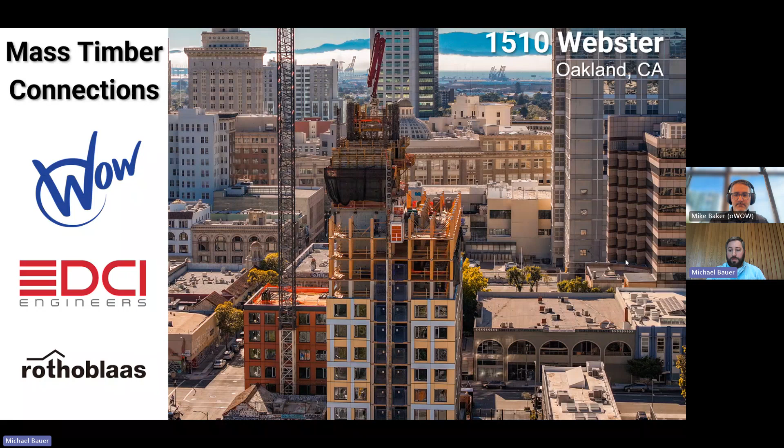Hi, I'm Mike Baker, I'm the Director of Architecture at OWOW. OWOW is a vertically integrated real estate company located in Oakland, California, and we have an in-house development, design, construction, and property management team. Our mission is to create sustainable urban living for the missing middle, so basically people making between 80% to 120% of the area median income.

And increasingly, we're actually moving into the true affordable market, building really affordable housing for very low income people, primarily in the Bay Area, but we're looking to expand throughout California. The way we're doing that, the way we're making housing more affordable, is through innovation. We're driving down costs through using innovative new construction technologies like prefabricated components, standardized units, supply chain management, and most importantly, an innovative mass timber structural system, which is what we're going to talk about today.

Our goal at the end of the day is to build higher quality housing faster and at lower costs through innovation. I also real quick want to add, if anybody has any questions throughout this presentation, if you're on your computer, at the top bar you'll see a Q&A section you can click into and type some questions. And if you're on the phone, you should see 3 little dots at the bottom where you can find that same section as well. We will answer questions towards the end of the presentation.

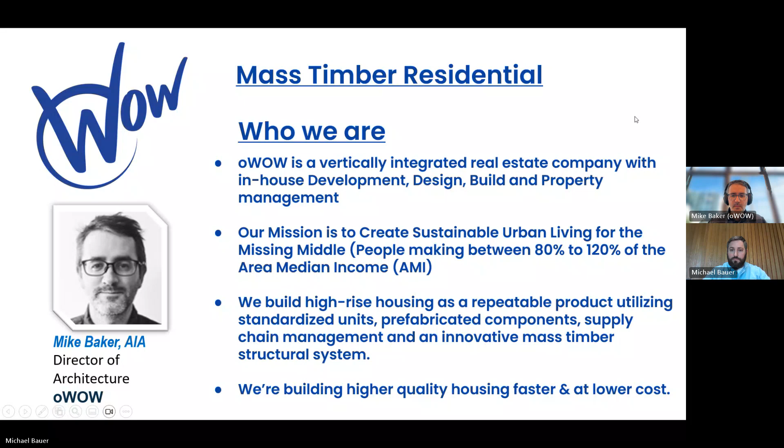So I'll talk a little bit about why mass timber and explain how we're using it. We're using it in a very particular way at OWOW, again to help us meet our mission of driving down costs. A lot of the things we're interested in with mass timber have to do with its material efficiency, its speed of erection. We can build a mass timber superstructure far quicker than we could with other traditional types of construction. That saves us money on our critical path, saves us money on general conditions, and speeds up everything around it. So a lot of that scheduled gain is driven by prefabrication.

So mass timber is kind of defined by its ability to be prefabricated. Everything is CNC machined and milled off-site. It comes to the site like a kit of parts and goes together really quickly. So that's really key to why we're using mass timber.

I think the other big gain of using mass timber is it's sustainable. It has low embodied carbon, sequesters carbon, and based on the kind of suite of other technologies that go around mass timber, there's the potential for lower operational carbon over the lifetime of the building.

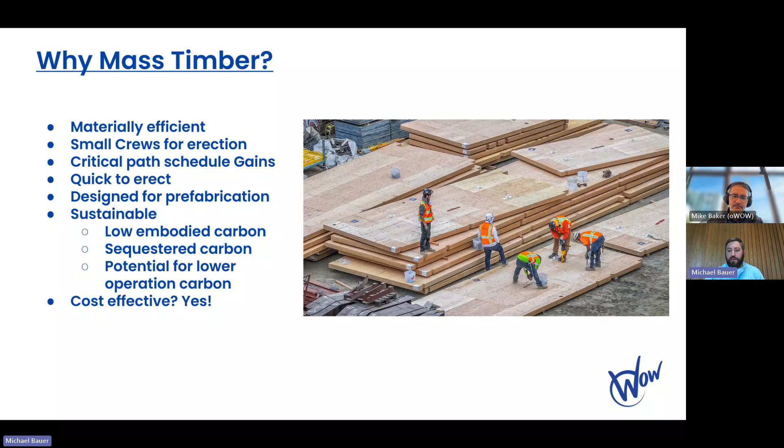One thing I want to highlight, Mike, and you mentioned it, but I really want to emphasize, is that you only use mass timber. All of your projects across the board take that approach, and I think that's one of the keys to pushing the amount of studies being done and getting projects to where they are today. Yeah, definitely. That's the other thing, we're trying to basically replicate our success, learning from projects and taking what worked well to move on to the next project, and to kind of repeat that and always be gaining efficiencies and economies of scale by using the same approach over and over.

And the scale of project that OWOW is focusing on isn't something that we could build out of stick framing. We're replacing projects that would generally be concrete construction, and so there's a lot to gain with all of those points: the sustainability features, the speed of construction, and so honing in on one specific construction type has allowed for a lot of exploration of efficiency. And it's been fun to get to work with OWOW.

I'm Michael Bauer. I'm a senior project manager at DCI Engineers. I'm based out of our San Francisco office, which is, for those of you who aren't familiar, just across the bay. I'm looking out now at Oakland, on the other side of the bay. I had the pleasure of living just a few blocks from the 1510 Webster project while it was in construction, so I was going out there almost every day just to check in on things, and it was an exciting project. I was really excited to be part of it.

I've been at DCI for coming up on about 7 years now. We have expanded. We started in Seattle. We expanded across the West Coast, and then recently we've also merged with some companies on the East Coast, and so now we're spreading from coast to coast, and we've got licenses in all 50 states. So we're happy to work on projects in any state, and also Canada as well. We've got some licenses in Canada as well.

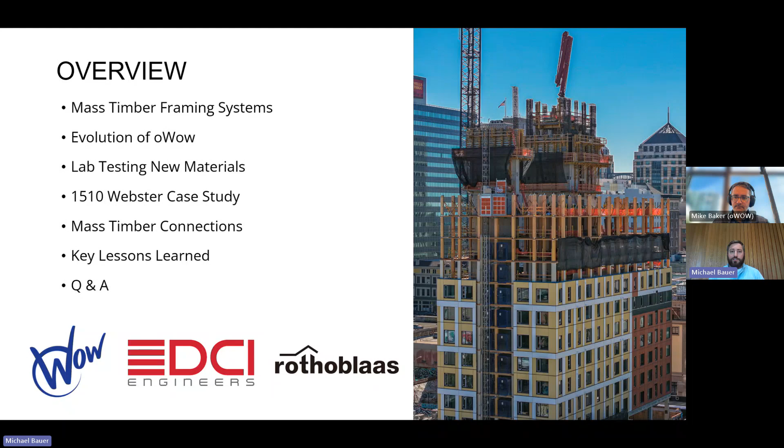So the ones we really want to focus in on are going to be the post and beam, which is kind of more conventional. It's a one-way panel span to beams, and the beams are supported by columns. Now, you can also use a girder system and have post, beam, and girder. We do get nice open spaces. So if you were going to do either a classroom or a larger space, you can get really impressive spans and spaces out of that.

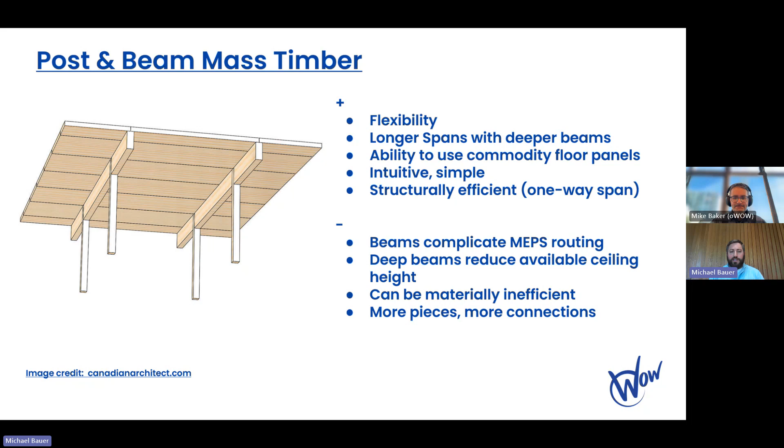The downside for us is going to be that it's going to increase the depth of these elements, and we're going to add a lot of additional connections as well. So there's a time and a place for it, but today we're really going to focus in on the point supported or the post and plate. The post and plate is going to reduce spans, but it's going to increase the clear height. And the key difference that I found was great was it was very easy to coordinate with the MEP consultants on these projects because there's nothing to interfere. It's a lot more similar to a flat plate concrete project than it is a typical mass timber project.

We're not talking about making horizontal cores. And then where we are making vertical cores, our tributary load to these columns is relatively low. So we do have some flexibility with locating plumbing penetrations along the panel. And that's something that we coordinated. We ran modeling analysis on to be able to develop where we were able to do those.

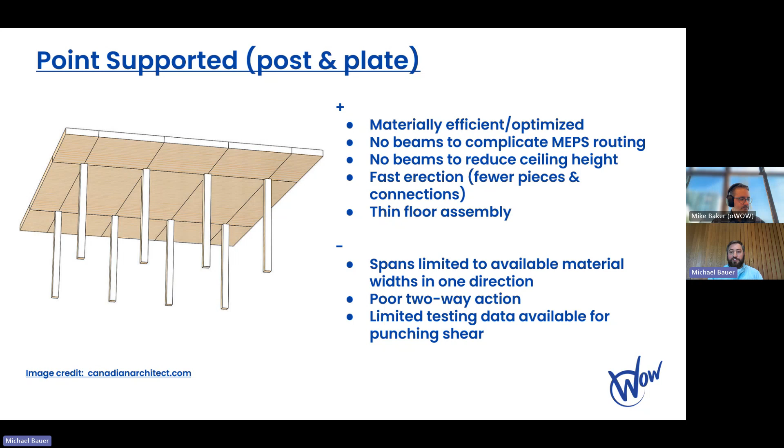But one of the key things on that, and I'll pass it off to Mike for this, is OWOW took the lead on this project, and they knew one of the best ways to find efficiency was going to be to run some tests. So I'll pass it off to Mike, and we'll talk about 12th Street, and then we'll go into some of that testing. Thanks, Michael.

It's a really nice looking commercial space, but we realized that it wasn't going to be a good solution for building affordable housing based on its costs, based on the complications of coordinating all the mechanical through those beams, the depths of the beams that we were going to require. It just didn't make a lot of sense. And so we saw this project up in Vancouver at the University of British Columbia called Brock Commons. I'm sure many of you may be familiar with it. And it utilized a point-supported or post and plate approach. And we saw what they had done and realized it could be the perfect fit for our approach.

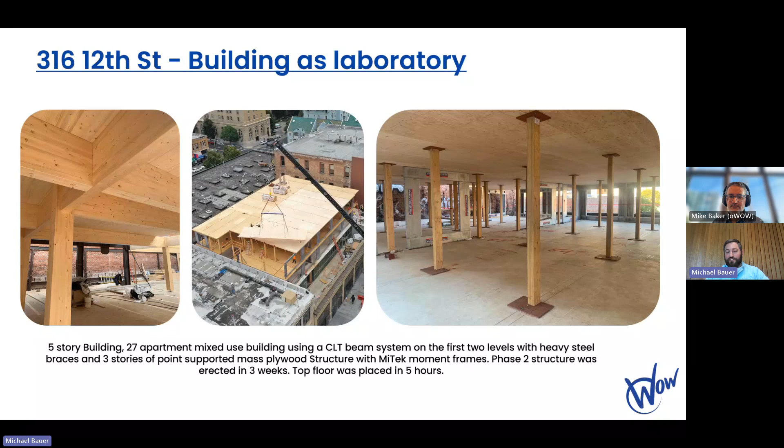Yeah, so we commissioned Wood Research and Design up in Oregon to run a bunch of structural tests, and Michael can probably speak more specifically to the tests, but in particular, because this is a point-supported approach, we needed more data on the punching shear capacity of the panels. So we ran through a whole host of tests, and unsurprisingly, the panels performed significantly better than we had originally anticipated. I think we basically broke the testing rig at like 130,000 pounds. We couldn't force the punching failure.

And there's been some other tests since then. They've had similar results. But the punching failure often causes a flexural failure. So we're still getting that bottom lamella at the point of load application, which is great because punching failure is a brittle failure and we're trying to avoid it. But it was hard to get any data that we could back out after that because it was so strong that it was forcing the limits.

You can see the beam above at the very top of that image here is actually bending a ton, and they were worried about breaking the rigging equipment, not the panel. So the panel was stiff, but it also was meeting the deflection limits that we were looking for. So the testing went really well. Yeah, and those were the key tests.

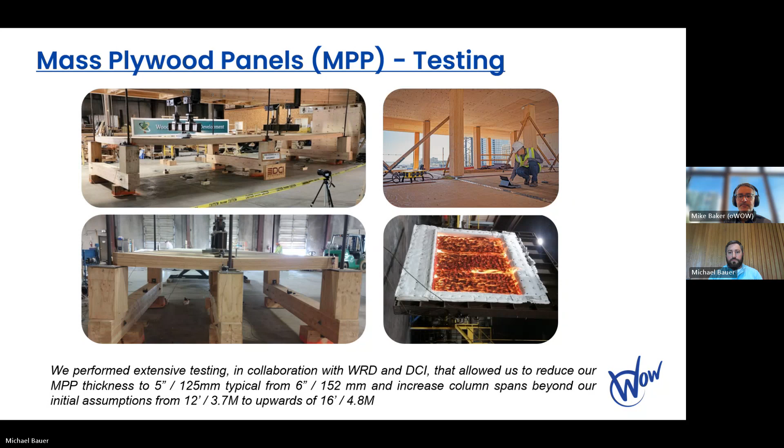So this is 1510 Webster. You've probably heard of it. It's a 19-story project here in Oakland. It's multifamily residential with 236 dwelling units and 186,000 square feet. It has a 2-story Type 1A podium, so it's post-tension concrete. And then above that, we have 17 stories of Type 4A. 16 of those are mass timber, and the roof penthouse is cold form steel.

So this was the first prescriptive Type 4A project in the country. And by that, we mean it's complying as of right with the 4A building code. Here in California, unfortunately, we can only do 17 stories of mass timber as opposed to the rest of the country. But otherwise, it's compliant with the code. And a big aspect of that is everything needs to be encapsulated. It has a 3-hour rating. It's a really robust structure.

The codes are pretty conservative, but even then, we found great success with the erection of the superstructure and the enclosure. So we were able to go from the top of the podium. It took us a couple of months to get the foundation and the podium in place. Once we had the podium in place, we basically built this entire building, superstructure and skin, in 2 months.

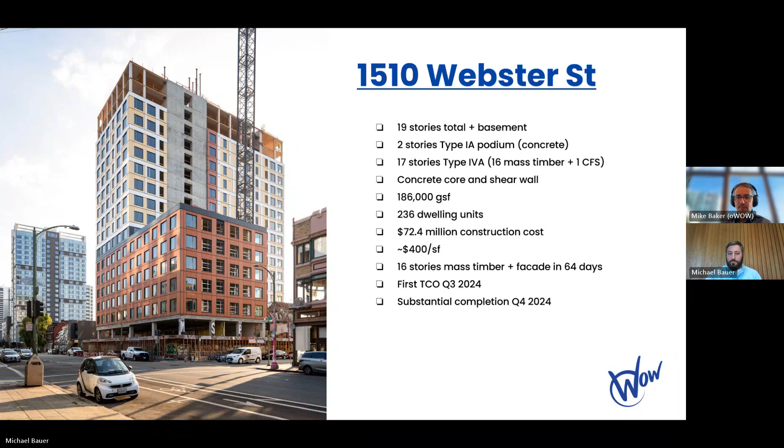Here's a quick video, a little truncated, but it gives you the idea. We were basically doing a floor every 3 to 4 days. We would set the mass timber columns for a floor in a few hours, literally, and we could set an entire floor of panels in less than a day. We're using a prefabricated facade system that comes in large 30 by 10 foot sections that clip onto the building, and we could do an entire floor of those in a day. It was really insane how quick it was going. We could barely keep up.

We'll talk about what made that possible in the next couple slides. One thing to add, you could probably tell from the graphic that the mass timber structure of 16 levels went up just about as fast as the penthouse for the elevator overrun. Everyone knows elevators are challenging, and it really was true here. We had more headaches getting things compliant with the elevator shaft than we did RFIs during the timber installation, which was just a handful, and pretty easy to respond to. So it was really smooth on our front, and you can see from the image how few people are on site.

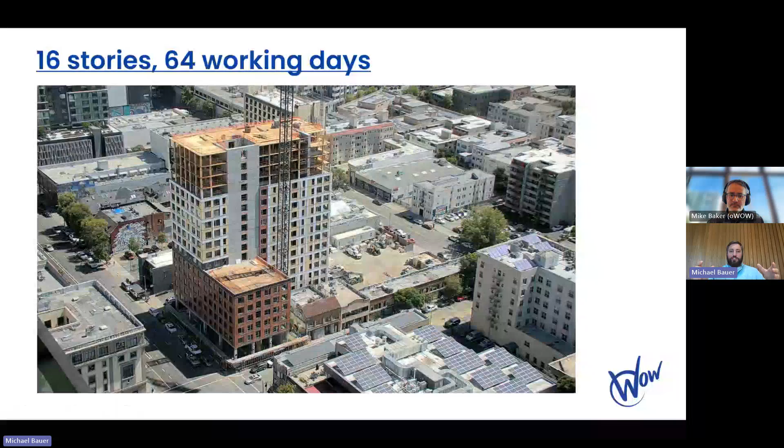One other thing to note is that OSHA does have requirements in the code about how much exposed mass timber you can have. We had a project on Treasure Island that had topped out before they'd set the first facade panel, which obviously isn't great from a moisture protection standpoint. This is in the code because of the fire protection plan, but there's a limitation on how many levels of exposed timber you can have at a given time.

So the facade has to chase the highest operable deck, which means you've got to have a lot of coordination. You can't have something lag. These panels were coming from Canada, so they had to get to site on time, coming off the truck and then being installed in order to release the next level.

That first level was a little slower—the panel still went in a single day, but from the first to second level of timber was 4 or 5 days. Then that repetition got down to 3 days. In the last couple levels, once the core had topped out, they were setting those in 2 days—a day for columns and a day for panels. It felt like they were finishing placing the columns by noon and the panels by 1 or 2 p.m.

So even with all these working days, there was constant crane utilization—they were always doing something. It was super efficient at making sure the next thing was going into place; if they were having issues with a column, they could pivot and tackle something else. Kudos to the OWOW construction team and the Webcor construction team for having that plan in place and really taking full utilization of the crane.

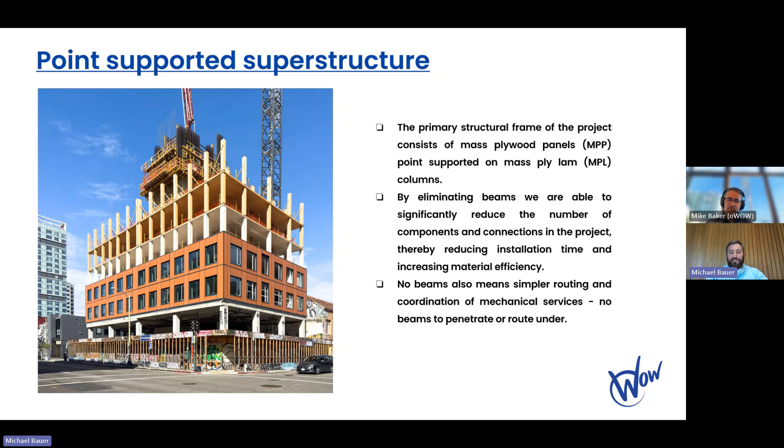Here's us setting the first floor of columns, sitting on top of the concrete podium. You can see the Rothoblaas pillar connections that Michael will talk about later, but they were pretty pivotal in helping us achieve the speed of erection we did, because the connections arrived on site maybe a few weeks before, and our team on site installed all the connectors to the bottoms of the columns, setting up in a little assembly line.

I think we have a photo of that later. The columns were lifted in bundles by the tower crane since they were pretty heavy. We were able to place columns in about 3 minutes per column with these connectors, because only a few fasteners needed to be made on site. They're braced, but practically self-supporting, they could kind of stand up, though obviously they need to be braced before the next layer of flooring comes on top, and the bracing also helps true them so that they're aligned.

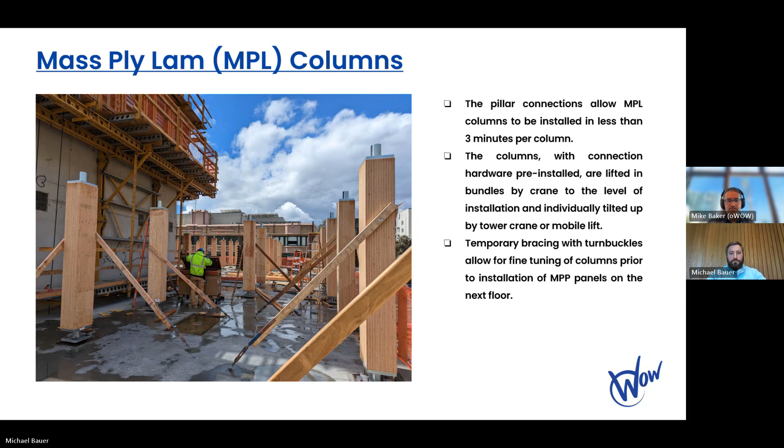Here's the last MPP floor panel flying in, or one of the last, I think the second to last, and also one of the smallest. This is about 2 months later. You can see how few crew members there are on the active level of construction. It looks like maybe 2 guys are actually installing the panel at the moment, and the others appear to be installing splines between the other MPP panels that are already installed.

There's a tower crane operator, probably 1 or 2 guys down on the truck where panels are picked straight off, and a few on the active floor. So it was a really lean team, and everything just kind of slots in place. That's the power of prefabrication. It's super precise, everything is CNC milled with the right tolerances, and across the project our tolerances were less than 1/8 of an inch across the entire length of the project, with the exception of the concrete.

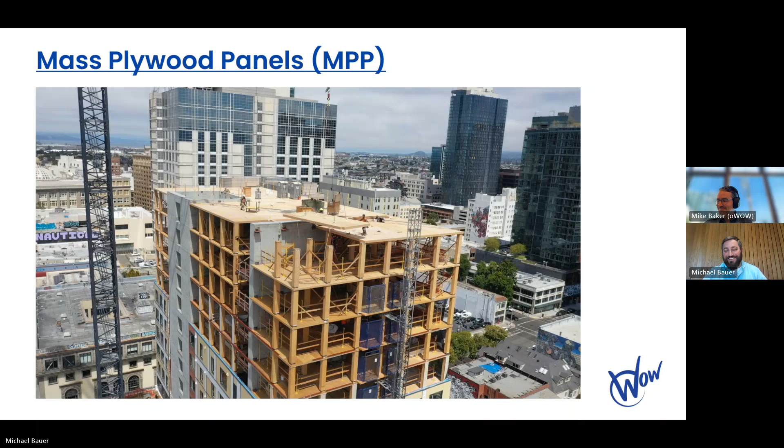So here's what I was just talking about. All of this is built in a kind of digital twin environment, in the digital space, to a really high degree of fidelity. That means every plumbing penetration, every HVAC shaft, every connection, literally every screw is modeled digitally so we can find all those problems before we get to site. Then these panels are fabricated directly from that digital twin, so all the plumbing penetrations are already in place when we get to site. Obviously we can go in and drill some after if we need to, which we did, but having a lot of that work done beforehand saves us a ton of time on site.

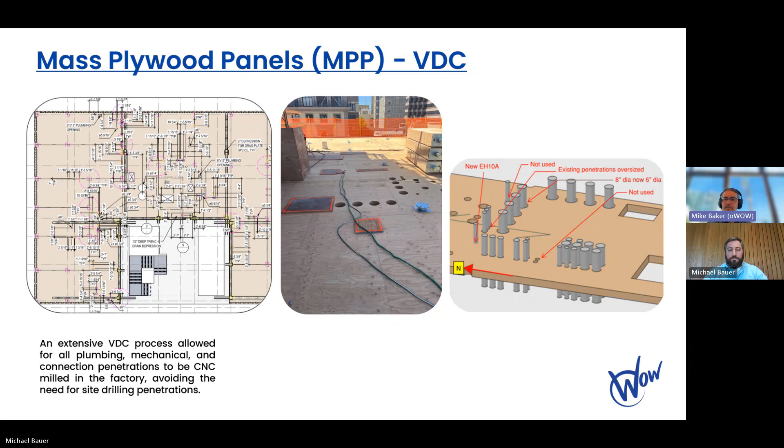And here's a closer look at that process, which included not only the modeling of the physical elements themselves, but a kind of modeling of how workers could actually install those components, how they could reach into tight spaces to fasten nuts and bolts. And we ended up having to change some of our details to accommodate constructability.

Yeah, it's pretty easy to draw some of these details and think that it'll work, but then actually working through hand access and tolerance, it's easy to think, okay, I can call out an 8-inch wide by half-inch plate, but that thing's 30 feet long. That thing's hundreds of pounds and incredibly hard to move. So we really had to think through what it was going to be like on site and what was going to be restrictive and what would give us some tolerance. Working with the clash detection team and OWOW to figure out what was going to work was imperative to the speed of construction that we saw on site.

This is a shout out to Cadmakers. They're also up in Canada. They were instrumental to getting this project built.

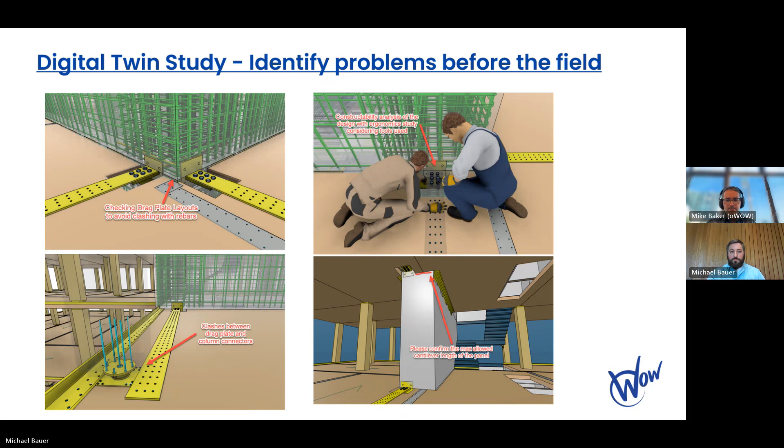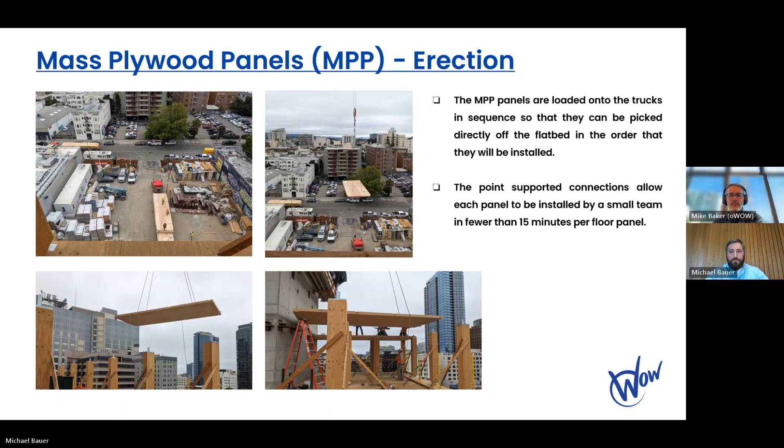Then just a quick discussion on encapsulation. Because this is Type 4A, we have to achieve a 3-hour fire rating. So only 1 hour of the fire rating is able to come from the mass timber elements. The rest has to be provided by non-combustible encapsulation, which basically means wrapping everything in 3 layers of type X drywall.

It's a shame because the wood is beautiful to look at, and it's a shame because this impacts the sustainability of the project. That gypsum board has a pretty high carbon footprint, so we're definitely looking at ways in future projects, especially in the 4B type, which is basically up to around 12 stories, where the upcoming code cycle is going to allow full exposure of the ceilings. That will mean we have to provide a thicker floor panel, but we won't have to encapsulate it, which we think is going to be pretty instrumental in getting more widespread adoption of mass timber.

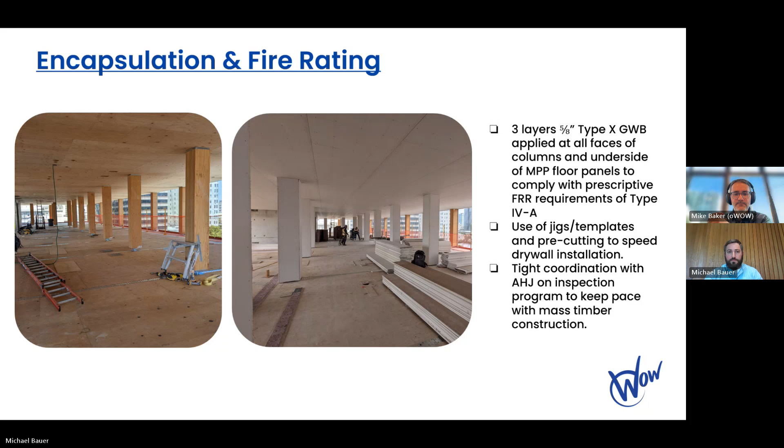And then just to speak briefly on some of the other things we have to do. We also have to provide a non-combustible topping, which typically in mass timber is gypcrete, and that also serves double duty as acoustic treatment. It has acoustic properties, so we've got some Acousti-Mats and flooring underlayment up there in addition to the gypcrete that help to mitigate impact noise. The mass timber generally performs really well from an STC perspective, but IIC impact noise is kind of a big deal, especially in multifamily residential. We're able to hit the code minimums for our product, but for higher end housing, you're probably going to have to use a more substantial floor buildup to achieve higher IIC ratings.

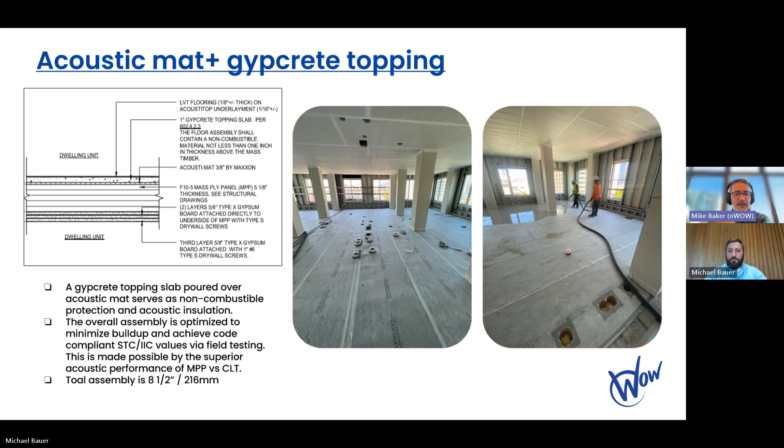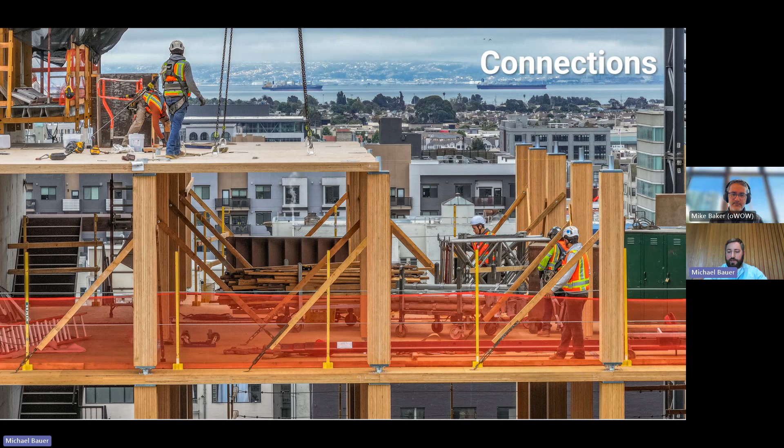So the pillar connection was not the initial plan for the project. We went through a number of iterations. You saw the 12th Street connection, which was an oversized plate. We had something similar to that. They would come back to us and say, we've got some ideas, what do you guys think about trying to do something where we install it and can fasten it as we go? So we came up with some details that were our own version of a pillar connection, where we were looking at something a little bit more isolated, fitting within.

One of the concerns with the 12th Street project was in type 4A, our concern was the fire protection of those panels. So finally the team came back to us and said, well, we've got this really slick connection, it's coming out of Europe, and we'd like to study the feasibility for the project. And we saw it and we met with the Rothoblaas team.

We were really excited because it was managing all of the things we were looking for. It had the strength, it had the quick installation. And one of the other key things from the structural perspective is that it really is acting as a true pin. In our column connections, we don't want a lot of rigidity at the columns. We want the shear walls to be taking our seismic loads, and we want to create less fixity at the columns themselves.

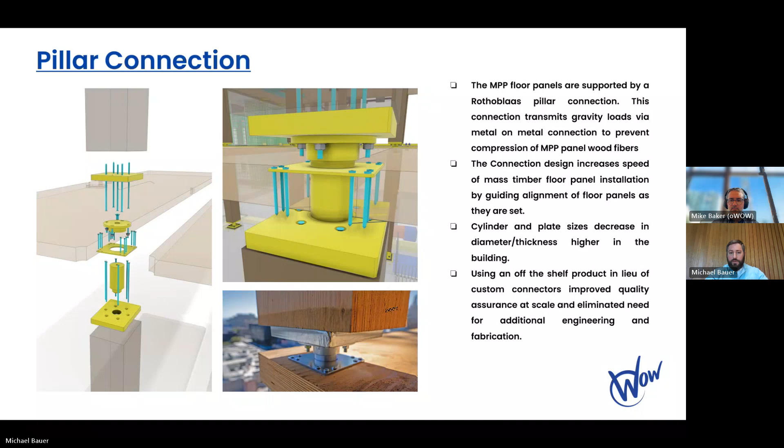So here we've got some installation images. They were all fabricated on the ground, and again all these columns are the same because they're all for one given level. So they're fabricated on the ground and then lifted into place. They were able to place them with a crane and basically thread the bolts through and get the nut on to be able to stabilize the column.

Those were snug tight and would hold in place. If you twisted it, you could get a little bit of twist out of it because there was a slot, but they were stable, and then they would come back and plumb them and get them square with those braces, and then they would get restrained again by that top plate connection as well. So it was a really slick connection. It was far faster than what we were reviewing with WoodWorks and their web core team with any of the details we had come up with. It's a really well thought through connection, it's strong. So we were really excited to be able to incorporate this on the project.

I've got to give kudos to the Rothoblaas team, because they worked with our engineering team and developed calculations to justify seismic drift compatibility. It was really pivotal, and this was a late implementation — we had already submitted for permit at least once with the city of Oakland, and Bay Area jurisdictions for permitting are not easy, they're very challenging, among our company some of the most challenging. Rothoblaas was able to get that in, and we were just able to submit it. We didn't get any comments because it was a very robust calculations package that we had coordinated with them. We didn't really get any comments on the pillar connection whatsoever, which is a testament to the upfront work provided by Rothoblaas on that. So it was a big success for us.

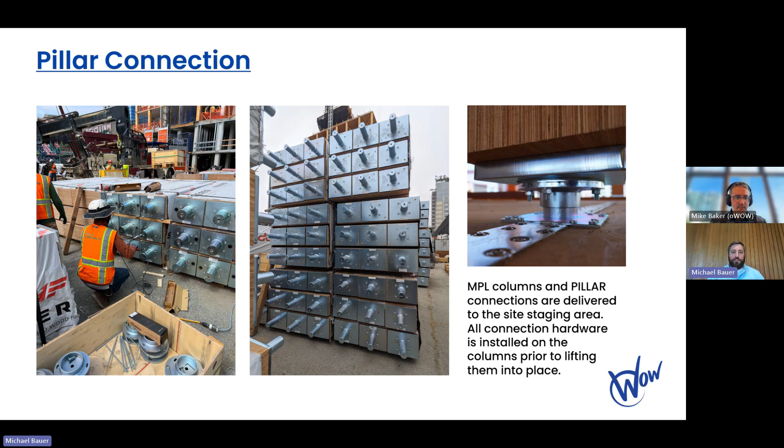So then just to look at some of the other efficient connectors, if our Rothoblaas connectors go in just a few minutes, we've got to be able to install the other connectors at a similar pace and find additional efficiency.

One of them I want to highlight is the core connection I mentioned earlier. Mike had mentioned that the tolerance was really tight on the project, probably less than an eighth of an inch, basically everywhere. It was a very close approximation to what we were seeing in the computer, but the core was the one thing that we didn't have a ton of control over. The construction team informed us that they needed a little over an inch of tolerance, but then they told us that inch of tolerance could go in either direction - an inch in or an inch out. So really, we were planning on 2 inches of tolerance there.

And the core connections that we were originally using were going to be challenging to get that as a reliable connection without field modifications. One of the more traditional connections for a concrete core is an L angle with the leg down, welded to a series of embed plates. Those are generally at like 24 to 36 inches on center. So a lot of embed plates, continuous, big, heavy, continuous angle. But if you're looking for that tolerance, and if the wall is going in, then the panel's not getting the same bearing area.

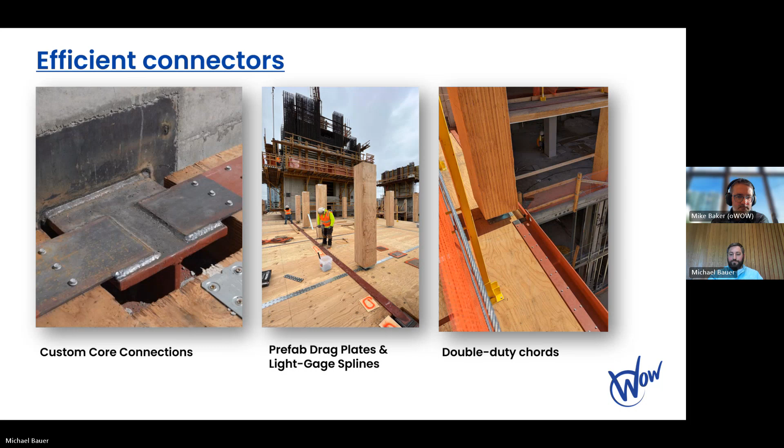So we really had come up with, I think, each of these had a number of different iterations of where we were. And we found ways of customizing these and getting them so that they could keep up with the speed of installation. And the result was 1510 Webster. It's now for lease, and it's been a big success for us. And now I think that we're ready. Mike, do you have anything you want to add before we go to Q&A?

I think there was one more slide with some conclusions. That's right. Yeah, so I think some of the key lessons learned from this project were that the mass timber structural system brought a lot of benefits, but it did require a significant upfront investment of time and money to plan it properly. We talked about the extensive VDC process. You also have to consider the material lead times and the money it's going to take to upfront those prefabricated long lead time items before the project starts.

So I think the mass timber was relatively quick lead times, probably a few months. For example, the prefabricated facades, you're looking at 10 months to a year from the time that you sign a contract to the time that the first panel arrives on site. So something definitely to keep in mind when you're looking at mass timber projects. It was super fast and it beat all of our estimates - it blew them out of the water, which was amazing.

And yet the kind of ultimate lesson was that you're only as fast as the slowest thing, right? You're only as fast as your critical path. So the rest of this project, what you're not seeing here, was built mostly with on-site labor. So traditional metal stud framing, all the plumbing, all the MEPs, everything was built on site. And those things were subject to the same kinds of delays that we see all the time in construction.

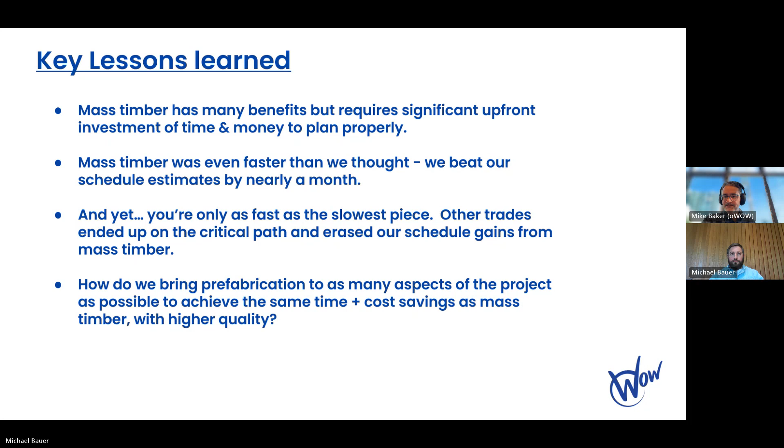Great. I think that brings us to our Q&A. Mike, do you see if there are any? I'm still sharing, so I'm not seeing any. Yeah, there's one.

So the question was, what kind of machining tolerances do you use on the panels, and would you make adjustments if you were doing it again? I think the tolerances were like a 16th or 32nd for machining. They were really, really tight. I don't know, Michael, if you have more information on that. Yeah, I think they're tighter than a 16th, because we were watching some of the interior panels, particularly these ones at the corners where you've got the routed hole coming over the top, get installed. Things were really precise. I wouldn't change much on the project. I certainly wouldn't be tinkering with that in particular.

Yeah, that's one of the key qualities of mass timber: the precision with which it can be manufactured is really high because it's straight from the digital space. So the tolerances can be really low. You're pretty much just considering, okay, what are the installation tolerances mostly, and not the actual physical properties of the material.